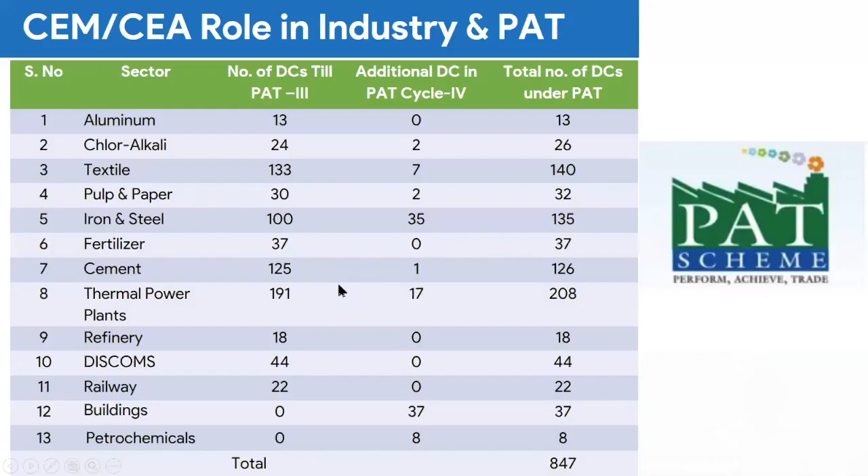All of you know that the PAT scheme is already going on, in its fourth cycle. There are, I think, 13 sectors in India, from aluminum to cement, etc. In every sector, many industries are coming into the PAT scheme, and there is a lot of role for CEM and CEA.

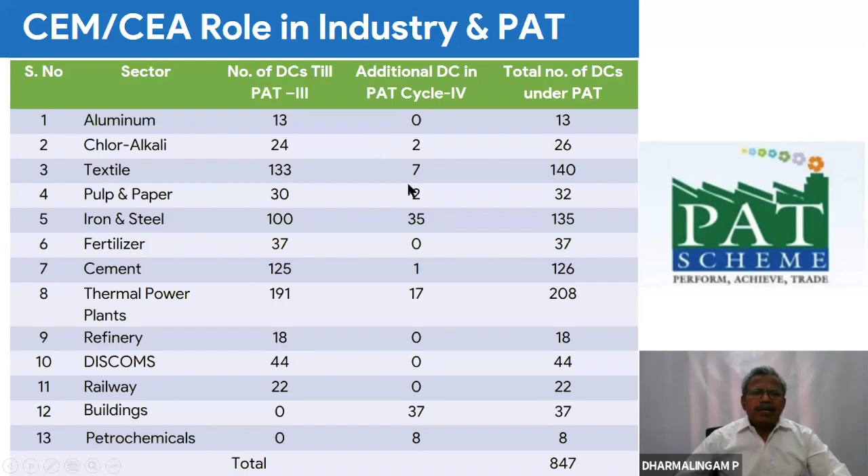Coming to the examination, it has been conducted for the last two decades. The first exam started in 2004. Now 20 exams are already over, that is up to 2019, and I think all participants are going to apply for the 2020-21 examination. Dear friends, I have experience giving training for all 20 programs - I am among those who passed in the first program, and some of our accredited energy auditor instructors also passed in the first programs.

So what are the qualifications required to apply? All participants might already know this - any graduate engineer, BE or BTech, with 3 years of industrial experience in operation and maintenance, is required to apply for certified energy auditor as well as certified energy manager. If he is an ME or MTech, there is a one year concession, so 2 years of experience is sufficient.

If a postgraduate, any management also with the BE graduate, 2 years experience is required. So the engineer, if they want, can apply for CEM or CEA. But diploma holders, equivalent to 6 years experience, can apply only for CEM.

Similarly, postgraduates in science, electronics, chemistry, mathematics can also apply because they are all working in industry in the utility department, and they know about this. So those people can attend CEM, but they require only 3 years experience.

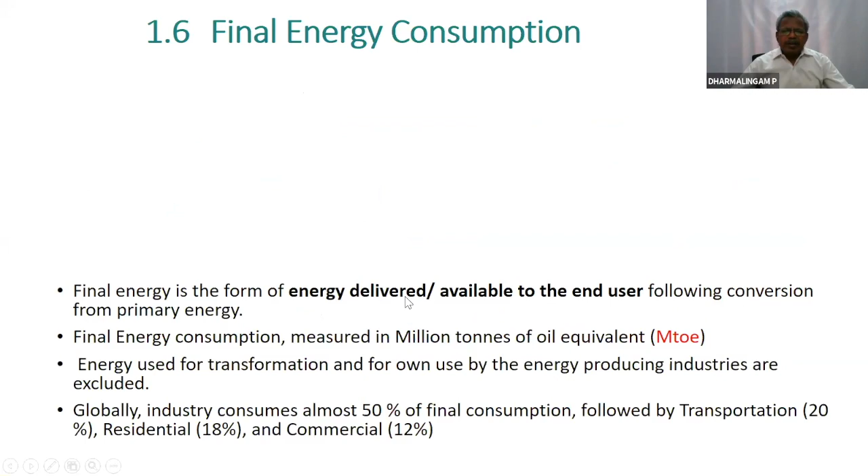This is one of the slides from the first book. Instead of simply discussing the point, we have used diagrams for better understanding—straight away you can understand in one stroke. That is our purpose; wherever required, we put it in.

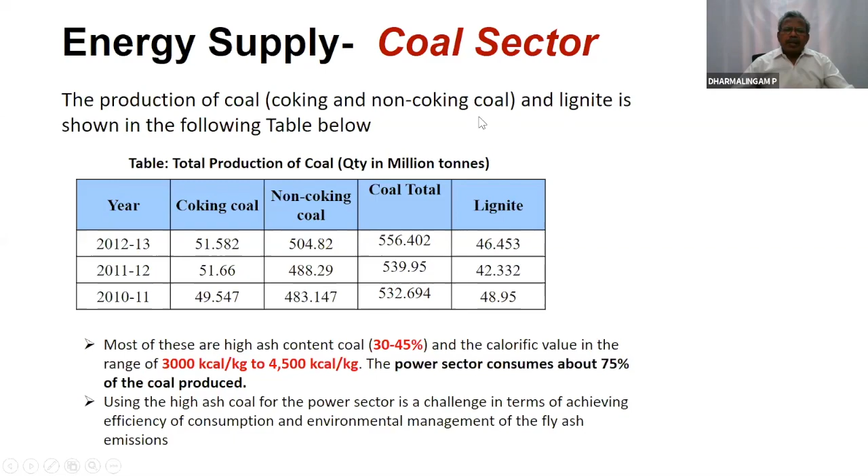Similarly, we also practice objective type questions. There are 5 questions given in objective type. You will be asked to do it for a few minutes, and then we will release the answer. This kind of practice we will be discussing in many aspects.

Similarly, this question is taken from the previous question paper itself—it has already come like this. There also some practice will be done.

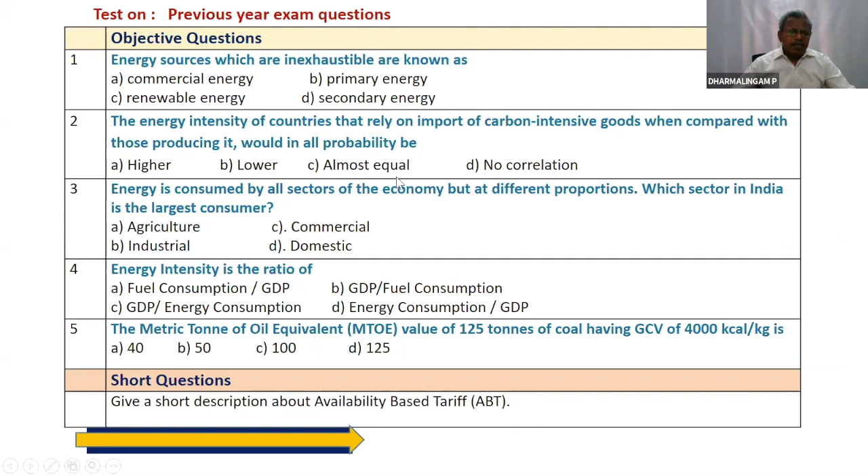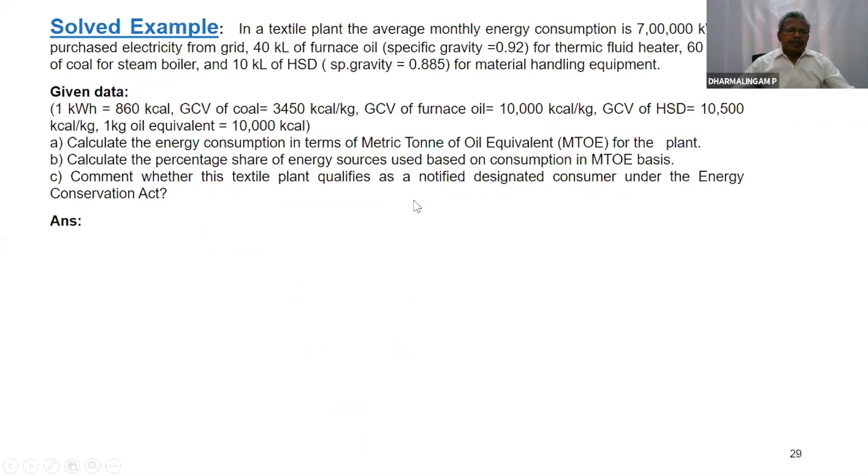Then solved questions will also be discussed. As given in the book, I will take up other problems from previous papers. We will solve each one step by step and explain so that you understand and are capable of doing the calculations.

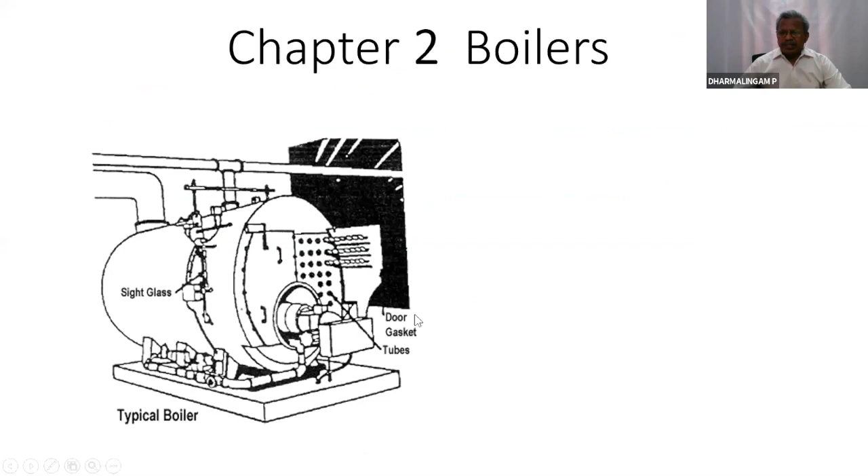Another thing is, many people have not seen a boiler but are attending the thermal classes. For those people, the book may give a small picture, but we also enhance it. For better understanding, we show some animations and real pictures. This is a unique difference in our course, specially prepared.

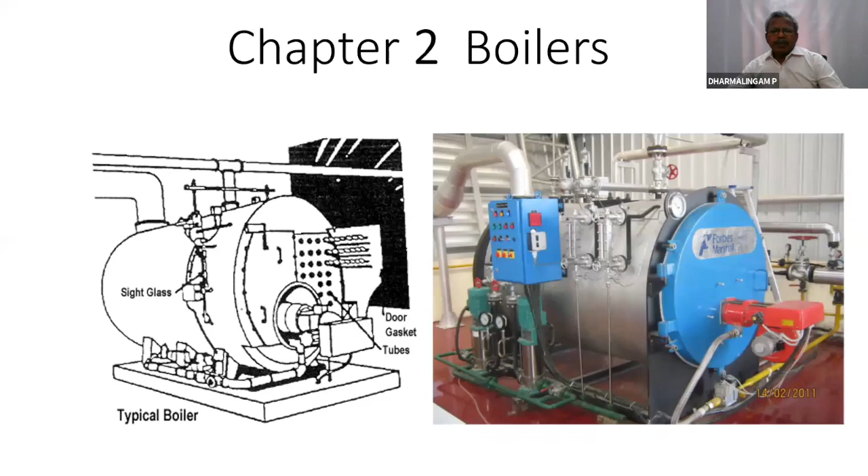So whenever such discussion comes up, we introduce animation. Many people don't know what carryover is, so we put this kind of animation wherever required.

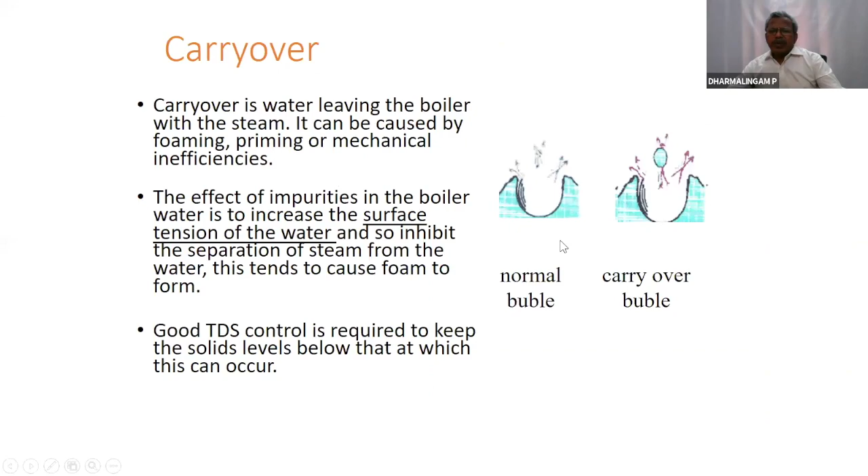Similarly, if we take a formula, we help you understand it better. Energy consumption is directly proportional to flow into pressure, divided by efficiency. So what is the relation between each one—we will discuss about that.

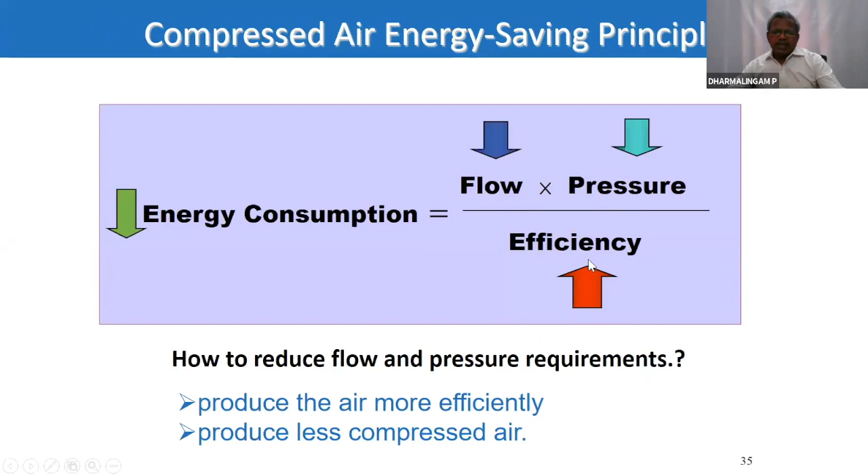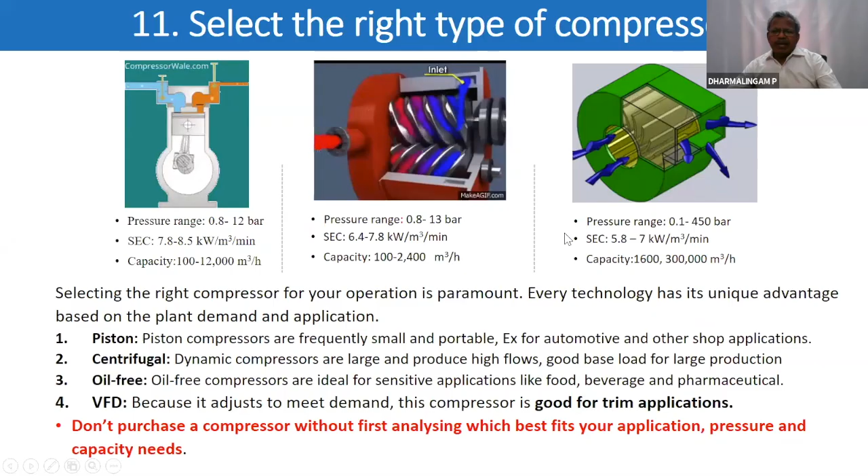Then a diagram from the industrial setting—some case studies and relevant case studies will be included, with animation shown wherever required. So this is the sample slide.

Dear friends, I have completed my presentation. I have discussed what the BEE exam is, who is conducting it, and how our program is prepared to be useful for candidates to pass. Thank you very much.